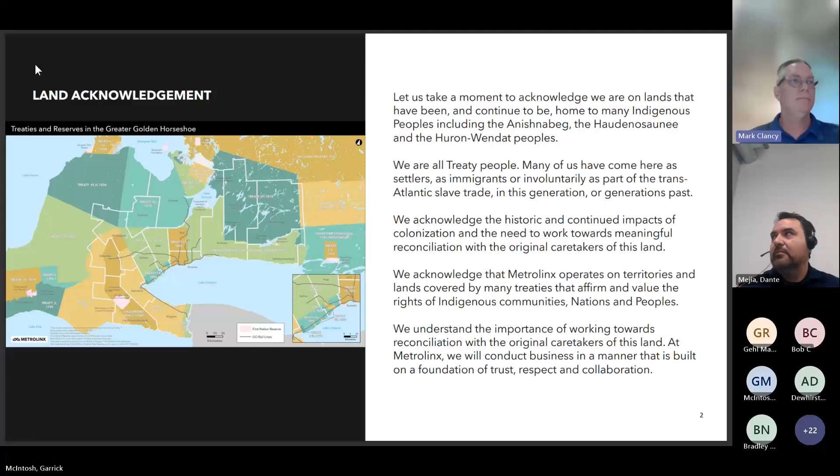So I wanted to just quickly introduce tonight's speakers. So I am Mark Clancy. I'm joined tonight by my colleague, James Francis, who is the Senior Manager, Subways Sponsor at Metrolinx. Welcome, James. You will see Dante Mejia on the screen, and Dante works for the Ontario Transit Group. They are the contracting organization that is building the Ontario Line in the downtown area of Toronto. And he is the deputy station manager at King and Bathurst.

We are also joined by Sarah Segden. She works at the Ontario Transit Group as well, and she is with our environmental management team at the Ontario Transit Group. So thank you and welcome to our speakers.

So we do have an agenda tonight. We will provide a bit of an overview on the Ontario Line project itself. Some of you may be familiar with the project. Some of you may be joining us for the first time. So I'd like to spend just a little bit of time providing a bit of an overview on the project. We will share information about upcoming construction activities, more details about all of the excavation activity that needs to take place at the King Bathurst sites. And we do have some information that we'd like to share with the community on methods that we are taking and the Ontario Transit Group is taking to minimize impacts to the community during construction activities.

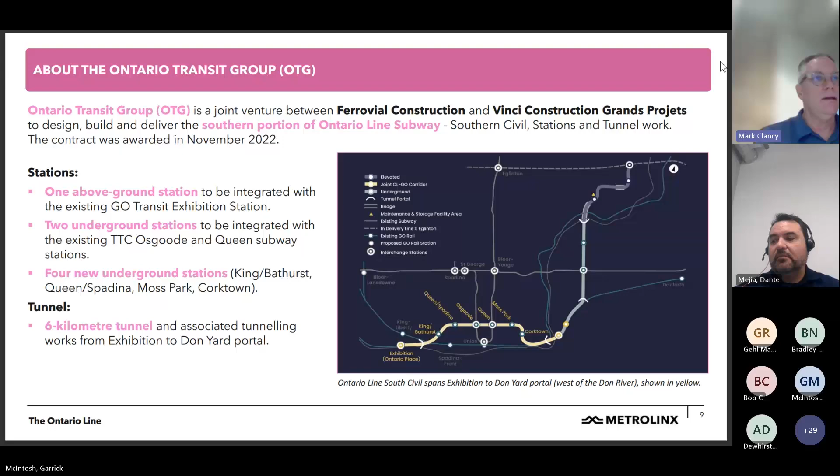All right, next slide, please. So just to give a little bit of an overview of the station location at King and Bathurst. So, where you see the blue line approaching from the bottom of the map, the subway is basically approaching from the Exhibition station, and it curves up to the King and Bathurst site, where there will be a station entrance at the corner of King and Bathurst on the northeast side. And there will also be a station entrance on the south side of King and Bathurst. So the 2 rectangles demonstrate the location of the stations. And then the gray rectangular shape, that is actually the station footprint that will be below the surface.

Just before we move on to the next slide, you've probably seen some of the heritage elements from the previous location, from the previous building on the north site. That building did feature various heritage elements. Those have been retained and stored off-site, and then they will be integrated into the new station.

And on the south site, part of the heritage facade remains in place, and you've probably noticed some of the metal or steel supports that are keeping that facade in place. And then that will also be integrated into the station.

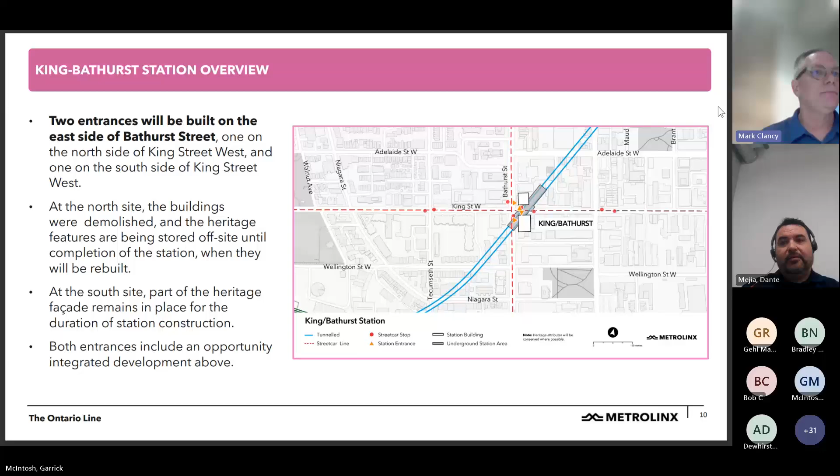All right, I'm going to hand it over to Dante. Go ahead, Dante. Thank you very much, Mark. Good evening, everybody. My name is Dante, and I'm the Deputy Station Manager for King and Bathurst. I'm going to be giving you a little bit of an overview of what is going on in that corner.

So starting with the overview or the look ahead that we will have in these coming months. During the summer, we are still working on piling operations. All this activity has been done during the spring of this year. We are at about 95% completion. The North Shaft is completely done. All the piling operations in there, which include the support of excavation and the permanent foundations, and also foundations for our shelters. Remaining piling is just on the south side of the King and Bathurst station.

Now for the summer, as I mentioned, we're going to be completing this task, the piling operation. Also, we are going to start with the installation of an acoustic shelter, which is going to be located on the north side of the station. And also the plan is to start with the excavation, one of the main activities that we will have this summer. The excavation will go through fall and through the winter up to 2025. Next slide, please.

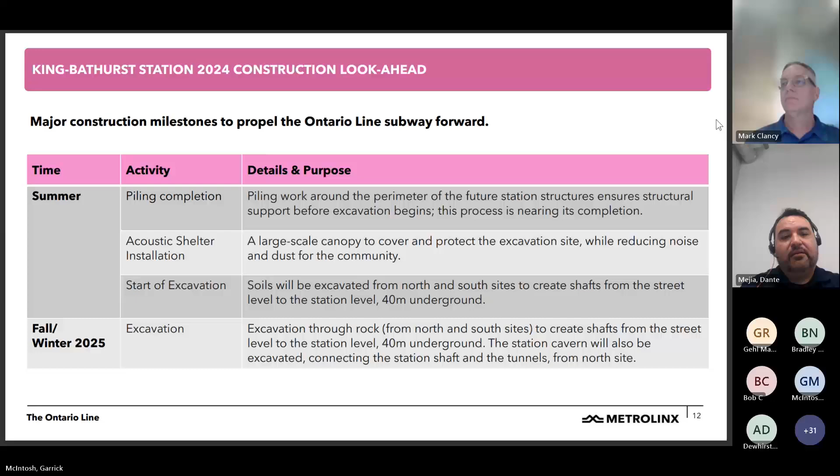Okay, so the start of excavation at King and Bathurst. Right now, we are currently doing some preparatory works. We started this summer in July for the north side, which is the one that we have in the picture. We are getting ready with all the preparation works, especially for the installation of the shelter, which is going to require some coordination. Several works are going to happen in there.

The plan is to start with the south side, but our target right now is to be pretty much simultaneously starting the activities north and south, maybe a matter of days in between. This is expected at the end of August of this summer. We will go through different phases of excavation through the rest of the year, and we will keep the community informed of every single one of those.

In regards to the working hours, the working hours will be basically from 7 a.m. to 11 p.m. It will be 7 to 7 with potential extended hours until 11 p.m. Also, we're expecting to be working some weekends from 7 to 5. This is on Saturdays, just on Saturdays.

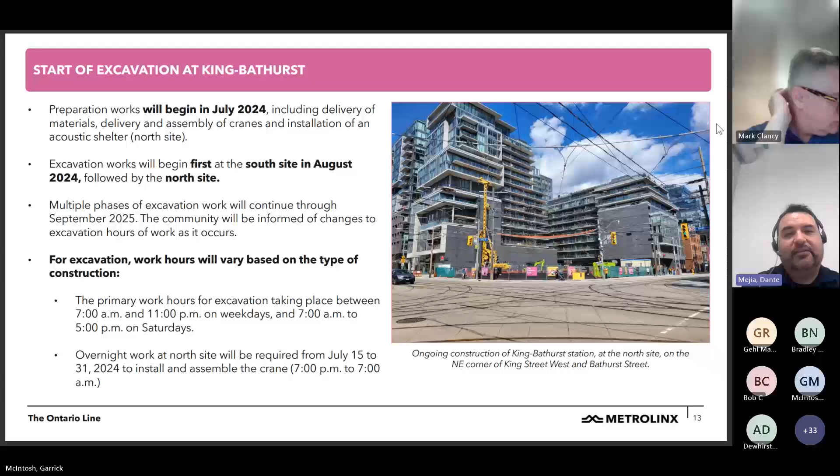So basically, when we start the excavation, in this case, it's going to be for the shafts. It's going to be a vertical excavation. This excavation needs to be supported. That's the reason for the support of excavation we have been installing during this past spring. This will allow us to keep a continuous excavation without adding any additional protections, especially on the north side, until we reach the rock level.

For this, we will use different types of equipment. The main one will be the excavators, but due to the situation that we have, in which the excavators are going to be able to reach only up to one point, we may be required to use different types of excavators and also the help of some tower cranes for this operation.

Okay, I'm going to expand a little bit on the overhead crane. The overhead crane will be delivered this July. It is planned to be installed during night works. We're not expecting too much noise from these works. This type of crane basically can move back and forth inside the shelter. It runs along those rails, if you can see them in the picture. So it allows us to move back and forth, delivering materials or removing spoils.

For the excavation, this is what we're going to use. The first phase of excavation on the north shaft will be through the excavators themselves. There's going to be a point at which the excavation is so deep that we will require different systems. In this case, it's going to be this overhead crane.

In the picture below, you can see the bin. This bin is going to be lowered by the overhead crane. It's going to be loaded inside the shaft, and then raised with the overhead crane, to be placed not on the ground you see here, but directly into the dump trucks that we're going to have there. In this way, we will minimize the sediments we can have on the site. Next slide, please.

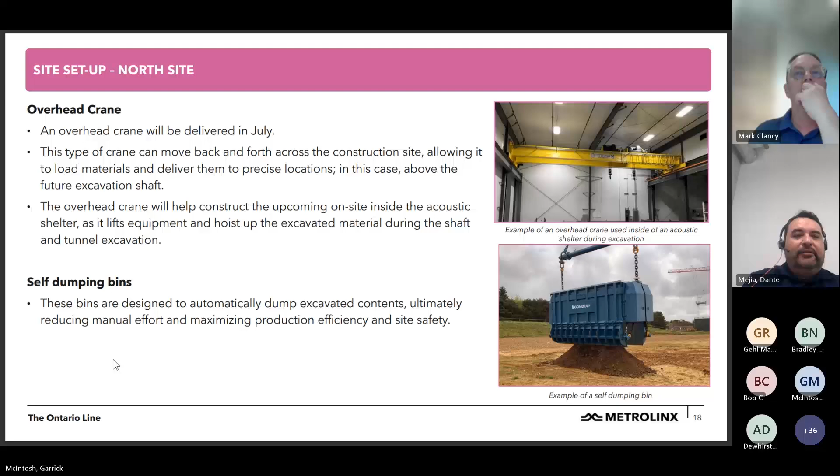The skeleton of this shelter is going to be a steel structure, in order to support all the potential loads that we have in there, winds, etc. All this steel structure is being supported with deep foundations on the ground, so it's going to be very, very rigid, very, very stable.

After we complete the steel frame installation, we will proceed to put the fabric, the cover on top, which will provide the cover that we need to keep the works inside.

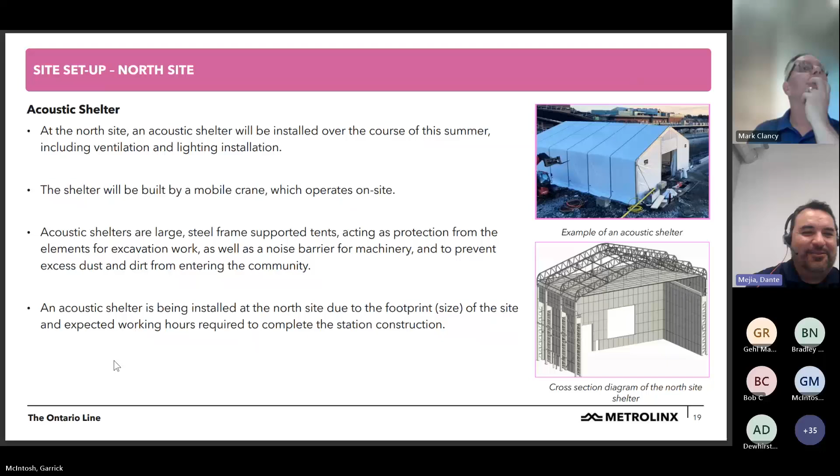On the south side, on the other hand, we will not have a shelter because the configuration of the site will not require it. In this case, it's going to allow us to install a tower crane in order to reach all the points of the site. This site is quite larger than the north, so therefore we will need this type of crane to assist us.

For this excavation, again, we start with the support of excavation, which is the series of piles that we have been installing so far. Once we start the excavation and start reaching several defined milestones, we will install the additional stability, which is the struts and walers.

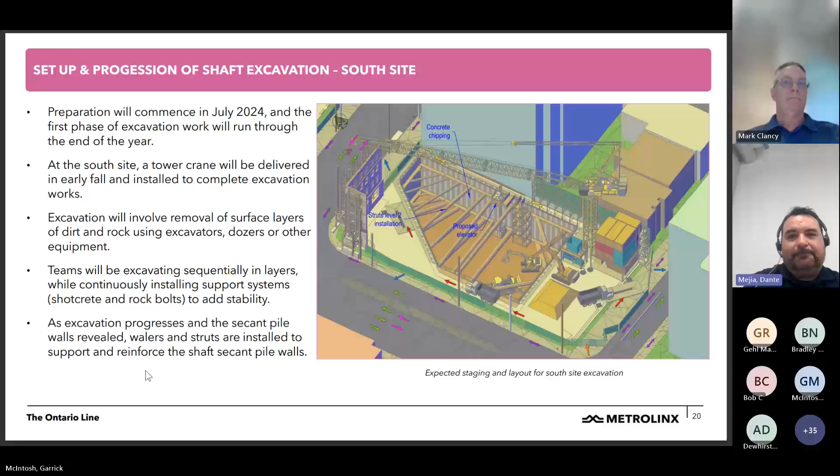The tower crane is going to be installed on the south side. The installation of this tower crane is planned to be around the end of September, beginning of October.

The advantage of the luffing crane is that it's going to allow us to raise and lower the arm, or the boom. So this is going to allow us not to fly over the sidewalk, which is going to be comfortable for all the pedestrians, not having a crane on top of their heads. So I think this is good for the project and for the public itself. Also, by doing this, we will avoid flying over any adjacent building, so keeping all the works within our site.

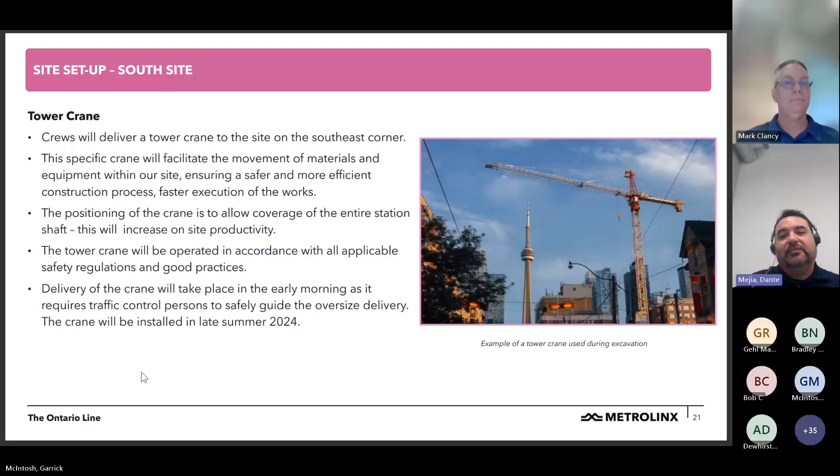Okay, this is, I guess, a very interesting topic. Now, what to expect in the community? So, during the excavation works, community members can expect the following. Delivery of equipment, including machines, as part of the preparation works. Some noise from excavators, loading of the excavated material, deliveries of the steel beams, and in this case, the struts and walers for the shaft. Shotcrete is expected, which is going to be pumped. That's going to be the way it's spread.

Also, the equipment used during this operation includes drilling machines, cranes, excavators, concrete pumps, and concrete trucks on site. Several trucks entering and leaving the work site daily. These trucks are going to be following a specific route, what we call our haul route. So they're not going to be all over the place; they're going to be following a specified route that we have for these trucks.

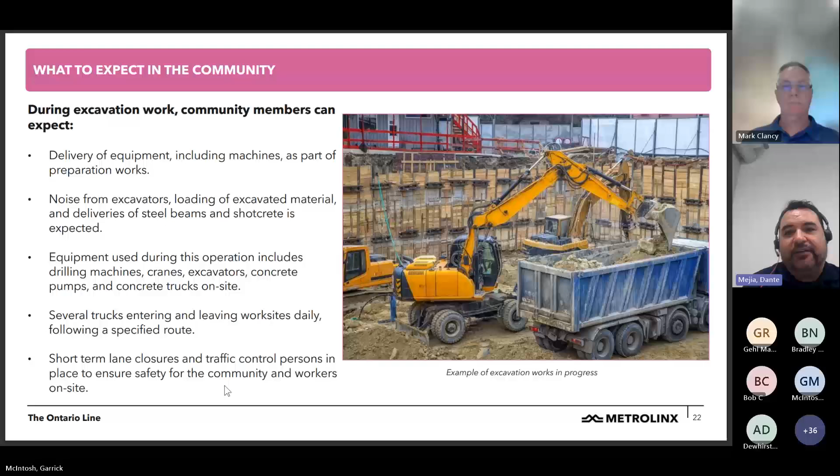Short-term lane closures. In this case, it's going to be just for delivering large pieces of equipment. Short-term lane closures means we may be talking about 10, 15 minutes, no more than that. And this is in order to keep the workers and the community safe while we're doing this operation. Next slide, please.

Reducing impacts to the community. Okay, so what we are doing in order to reduce the impacts to the community. Access points. On the north side, we will have two gates. One gate is going to be located on the north side of King Street, westbound. Most of our trucks are going to be entering through there and exiting through Bathurst. This is going to provide continuous circulation of the trucks, to avoid any backing of the trucks.

And the south side is a little bit more complex. We will have one entrance, which will be at the corner of Bathurst and Stewart. But depending on the phasing of our excavation, we may use different exits. One is going to be located on the north side, one is going to be located on Bathurst, and one is going to be located at the south of Stewart. As of now, the south of Stewart will be one of our main exits, but depending on the situation of the haul routes and the sequence of works, we may be switching.

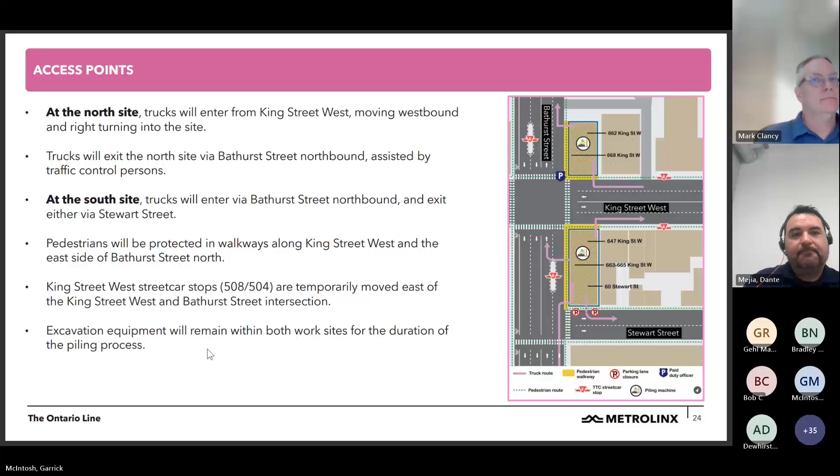Construction site plans and traffic and pedestrians. So all sidewalks and bike lanes will remain open. I guess this is really good news. Pedestrians will continue to use the sidewalks along the work zone. The parking lane on Stewart Street will continue to be closed. These parking spots were just south of our site. It was like 3 spaces, and these are going to keep being closed for a long period of time.

During our project, during excavation, and during the construction itself of the station. In there, what we did is that we extend the sidewalk into the curb lane, so the pedestrians are gonna have the free pass to the curb lane.

All roads will remain open. We don't expect any long-term closures now. This will be most likely at the very end of the project when we are working on the landscape. No impacts to the public transit. We don't expect any impacts to TTC access at the intersection of King Street and Bathurst Street, and we're expecting that these services will be uninterrupted during the construction.

And as a friendly reminder for the members of the public, be mindful and follow the directions of the flag persons on site when crossing and accessing the points, we will appreciate that a lot. Because at the end, our flaggers are working for your safety. I will say the same thing to the motorists, right? To all the drivers in there. When they see a flagger, I will respectfully literally ask to give us a break. So that will be very appreciated by our flaggers, and is in order to provide safety to all of us. Next slide, please.

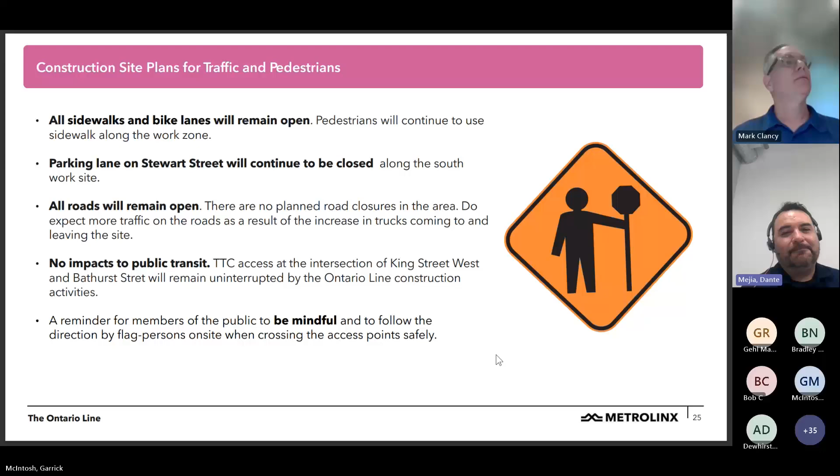Minimizing impacts with the community. So reduce impacts to the residents and business in the area. Mitigations will be in place, including air quality monitoring to track airborne emissions to ensure the construction activities don't impact the quality of the environment. Continuous loop truck routes, reducing the need for trucks to reverse using the backup alarms. So basically, our trucks are gonna get in through one door and exit through a different one to avoid any reversing. The street sweepers and wheel cleaning as needed, to ensure the soil and sediment is kept off the city streets and sidewalks. If you have been in our area, you most likely have noticed that we have this sweeper continuously working inside to keep the area clean.

In addition, we were planning to install a hard surface within our stations. It can be either concrete or asphalt. This is to completely minimize carry out of sediment into the streets. Next slide, please.

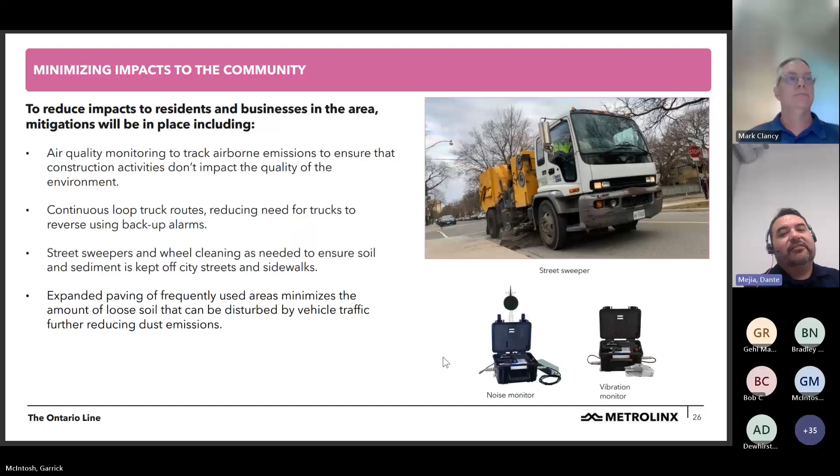Monitoring the noise vibration levels, utilizing sound meters and real-time monitoring system to track and control noise and vibration emissions to help minimize disturbance to the community and ensure project regulations and compliance. So we have these devices installed in strategic points in our system. These devices are continuously sending information to us. And whenever they detect something that is a bit above the requirements or the limits, an alarm is sent directly to several people on OTG, several departments, which we immediately try to tackle, trying to identify the source and mitigate it as soon as possible.

We have the site hoarding. This allows us to reduce noise. We also have noise and vibration monitoring devices placed on the site and also in the neighborhood for tracking the activities and the impacts that we have to the ambience. Also, these devices send us alerts to several staff of the OTG team. And I believe this is one of the biggest things to minimize the impacts, the acoustic shelter, right? Which will significantly reduce the noise, the visibility, and also the dust that may be generated. Next slide, please.

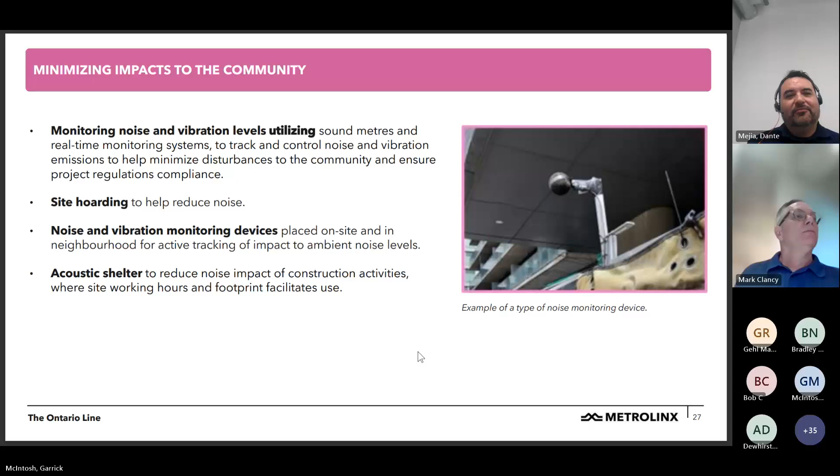So dust suppression. The suppression will be effectively managed through our site with the use of the following mitigations. Well, the mud mats are more for the carry out of sediment. As of now, we have to use these mud mats because we have not yet installed the platform with the concrete or asphalt. So these mud mats, which you can see in the picture on the top, are basically trying to capture all the sediment that is in the tires of the vehicles that are exiting. We require continuous maintenance of these in order to keep them in good shape.

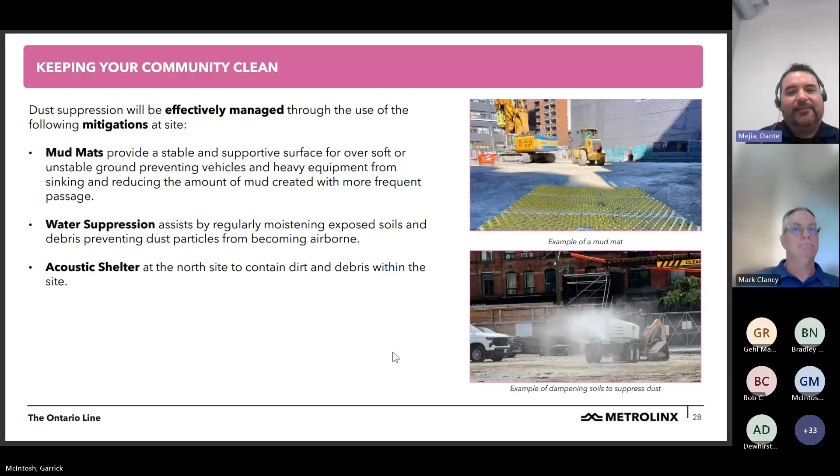For the dust control, the plan that we have is to start using the water suppression, assisted by regularly moisturizing exposed soils and debris, preventing those particles from becoming airborne. Now, for the excavation, based on some experiences that we have with the subcontractors or other staff, we're expecting that the soil can be wet. So this will help to not generate any dust while we're excavating. We are expecting to find a more dry situation maybe whenever we reach the rock, but for that situation, whenever we start encountering the dust, we will have this water suppression system to assist minimizing all the dust in there. And again, the acoustic shelter, which soon you guys will be able to see on the north side of our site. Next slide, please.

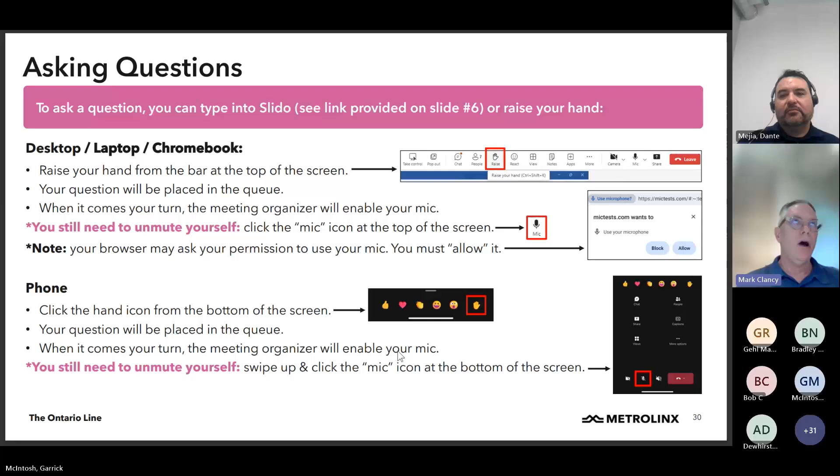The next question was, how much will the acoustic shelter reduce the noise? And there was another question about the acoustic shelter that came in that I'd also just like to quickly address before we talk about the reduction in sound from the acoustic shelter. So if I can just get my colleague to go back to one of the previous slides where we show the north site where the acoustic shelter will be in place, because I think this picture will give us a good indication of what's happening there. So another slide up, further up, where I think there was a picture of the buildings within close proximity of the site.

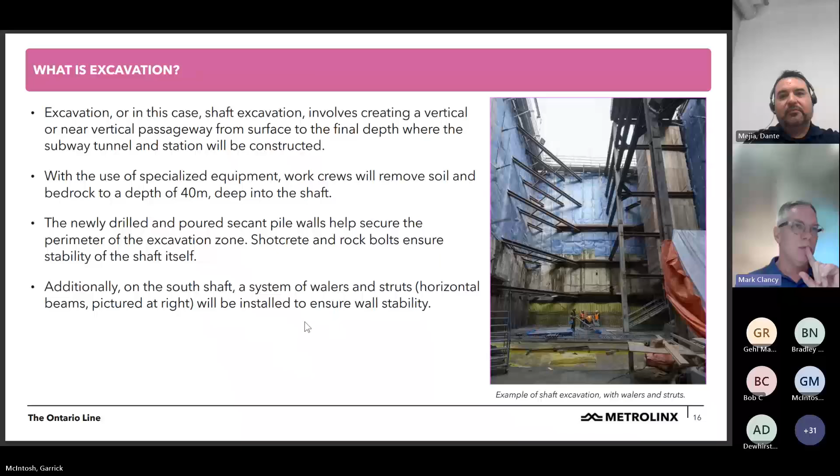And at this site, because we're really constrained and there's a condo building that goes around this particular site, we cannot install a crane tower with an arm that would extend over the site to allow us to do what we need to do. So on this particular site, the acoustic shelter will fit and it will work here.

And this is the first time we're using this type of acoustic shelter in the GTA, but the acoustic shelter has been used in many other places around the globe, such as the UK. And I think there's been a few other places around the world, such as Sydney and in New Zealand. So there is some experience out there globally, and we're bringing that acoustic shelter to this north site.

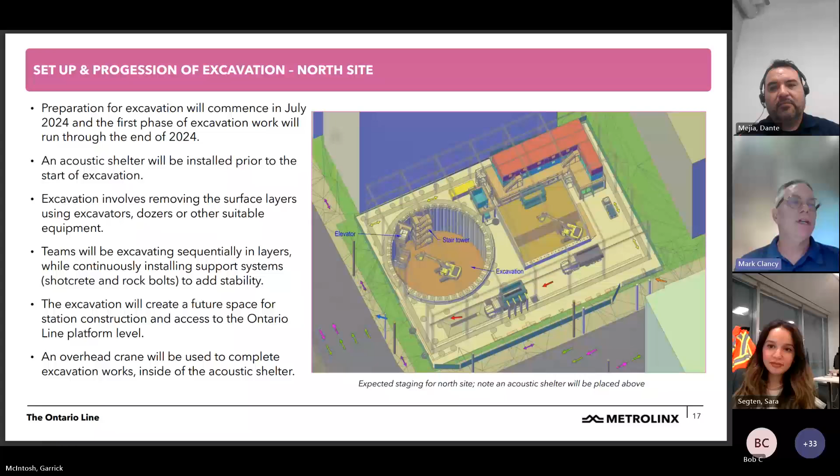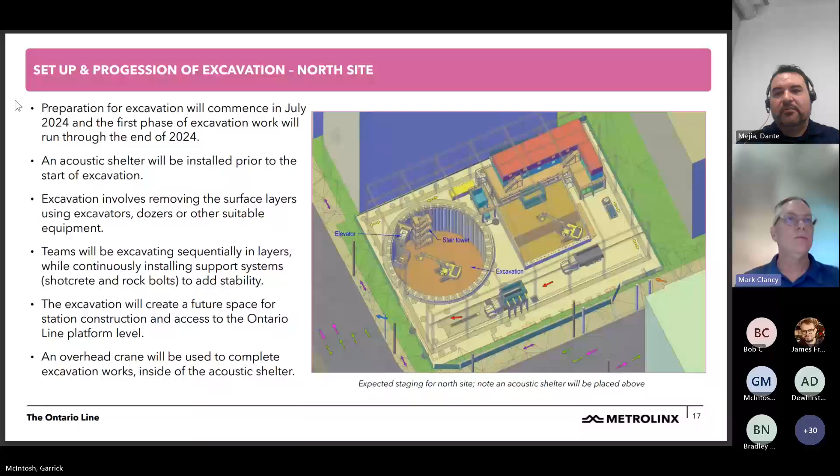Thank you, Sarah. Really appreciate that update. And again, Nikki, thank you so much for your question. I hope that answered your question. And I do want to go back over to the Slido for one moment. There was another question asked about where is the south portal going to be exactly? And so I can respond to that question.

So from a street, geographical area, if you can imagine being at the intersection of Strachan and East Liberty Street, just south of that area, there is an existing GO train rail corridor.

And the tunnel, the portal, will be built within that particular location. So there's a small street off of East Liberty Street called Pirandello. It's a dead-end street. And in that area is where the tunnel boring portal will be built. So it's not going to be at the King and Bathurst area, but closer to the Exhibition station.